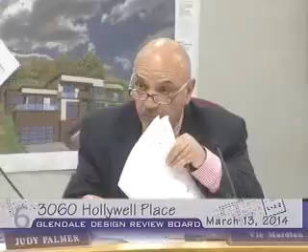Our thought on that was, since they're proposed as block walls, that leads to the stepping. They could either be poured-in-place concrete walls or perhaps block walls. I'm not sure how this works, but I think they can be cut at angles and then capped so that we don't have that continuous stepping.

Can we use poured-in-place concrete for the retaining wall? If it had a roughened surface texture, I believe you could, Roger. Let me look.

We've been seeing a lot of retaining walls, not just in current proposals but past designs, that have so many different flat surfaces and short stepping aspects that it's really at odds with the goals of the hillside design guidelines, which are to let things blend into the sloping terrain a little better. So we'd be open to hearing from the board if you had any ideas on how to achieve that.

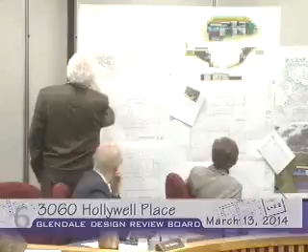As far as I remember, these are the oak trees here and here. This is outside the property, outside, in the corner, and we are here—we are not touching any.

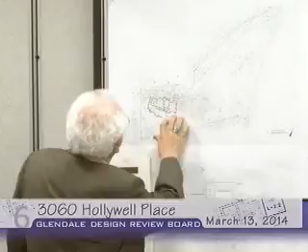Do we have a tree report on this? We don't have the tree report, but I believe Annie Schitz sent her recommendation—you should have it in the file. Her notes said that no tree report would be required, and none of the on-site oak trees would be impacted by the project. Now, with this conflicting information, I'll try to contact her again and confirm.

And how tall are the walls on the sides up where the patio is? We are showing it in the side elevations—you can see it's about 7 foot, and these are walls, not retaining walls. A portion of it is retaining wall, but a portion is not.

Any other questions? Got a question on your elevations—you call out the railings as wood and glass, but on the perspective it's a little different. Wood is the support, it's the frame and the support. Other than that it's glass—the whole thing is glass. But which one is it? Are you sure, because on that elevation it shows wooden.

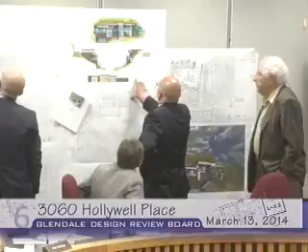See, this is the more—see here it says: metal rail with top cap, or glass mesh parapet.

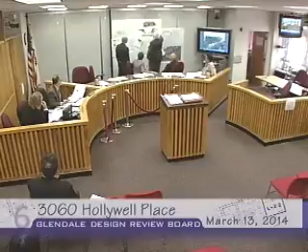Okay, so Mr. O'Connor, one question: so these retaining walls here are negligible? I mean, they're not—they are gradually coming down. It shows that it's coming down here. But if your natural grade is here, at this point it gradually comes down like that. That view is far.

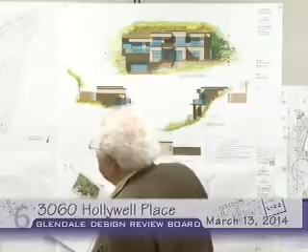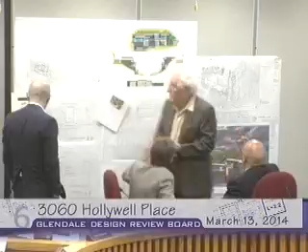Why is the wall 18 feet high here? This area—is that left, this one, right just here? This corner is because we have to have this 15-foot setback here. We put the landscaping in front of it to reduce the visibility of it. But it shows it up higher on the elevation. Yeah, but that landscaping—we don't see that. Okay, yeah.

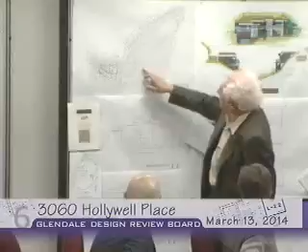The dirt is coming from the city property, through this and through these channels. This portion is solid rock, only a foot or foot and a half of dirt on top at most, then the rest is solid granite. So everything is mentioned in the soil report.

Comparing this to somewhere else in Glendale, or something that happens elsewhere, it's not logical to mention here. As a matter of fact, across the street the houses are mostly built on fabricated, man-made flat lands, fills. So if something happens there, I hope it will not, but that has nothing to do with this house. The channel next to us, if any rain or debris comes, will go through it, but it has nothing to do with this house.

Any questions? Okay, thank you. Thank you. I'm going to close the public session. If anybody wants to start with this, Mr. Mardian? Yeah, I'll start. I have no issue.

I'm glad, Madam Chair, you mentioned that our purview is to look at design compatibility, context in the neighborhood, and how it relates to the surrounding neighborhoods. As for the drainage and grading issues, I'm assuming staff has put a condition in the conditional use permit that it has to go through a grading permit process. That's correct. So those issues I rely on the city's review and the applicant's engineer to provide documents that will meet code requirements.

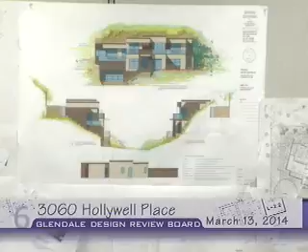My suggestion is, and I don't know what direction we're going with, and I don't know if the architect has even entertained the thought of essentially shifting, because looking at the backyard of this structure, it's pretty much unusable. There's no windows, there's no activities, it's just a 15, 17-foot retaining wall against a building structure that is basically set level with the retaining wall down below it. And it's creating this enclosed section there.

My thought, or just a study option, and I don't know if this was even entertained, was to create an impact wall along the back retaining wall and literally shift that entire second floor towards the back, and create the rooftop as a green roof or some sort of rooftop, so it becomes more of an impact wall, you can call it, essentially shifting the back to the front and setting the entire thing to the back. So that would have been, if this came in front of us as a preliminary design, an approach that I would have 100% suggested for them to entertain and try.

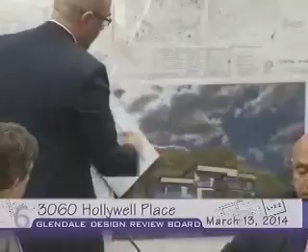The way it is right now, I think some of these lines that are coming together need to make more sense. Some lines are dying into here, and that's something else, so cleaning this whole thing up—we have this clean line above, but then the roof forms, maybe simplifying these and making them much thinner, much simpler roof.

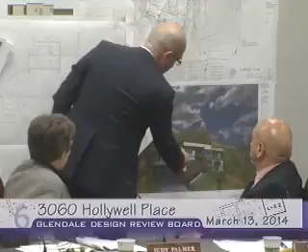I'm not sure exactly what it's going to do if we actually move this section, even pushing a portion of this back, and creating a deck here, maybe creating activities coming off to this front deck.

There was a comment made that there's no balconies, but obviously all the balconies on the existing face the view side rather than the street side, and this faces the view side. None of the buildings on the opposite side of the street have a view facing the hill—they're facing down on the opposite end. So this would be a logical location to put against the view.

So that's where I am right now with this. I would just wait until—

Oh, and one more thing. Suggestion about the street—I appreciate the comment about not cutting the block. What we can do is set the block lower than the site grade and then form the top piece for it as concrete.

So you have a much thinner, narrower line. These are set lower and then we form this, creating a simple, clean concrete look that comes down, so you get rid of that stepping. But that's just one solution. We'll look into whether we can have exposed concrete or if it needs to be textured, stamped, or formed in some way.